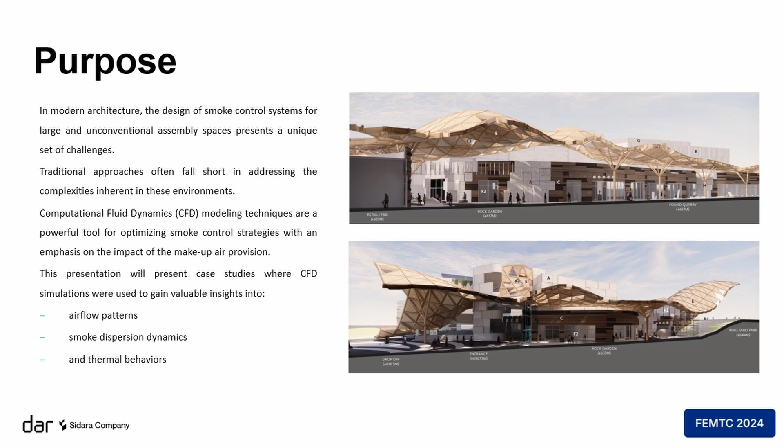So, why is it challenging to manage the smoke release in large and unconventional spaces? The main challenge, as a starting point, is definitely the geometry factor. Basically, due to the geometry, it's very complicated to predict how smoke will be moving.

The second challenge is smoke stratification. So, in complex geometries, there might be stratification occurring at different levels, and as such, any smoke control system that needs to be designed will have to handle different temperatures and densities at different levels. This is especially prominent in case of balcony spill plumes.

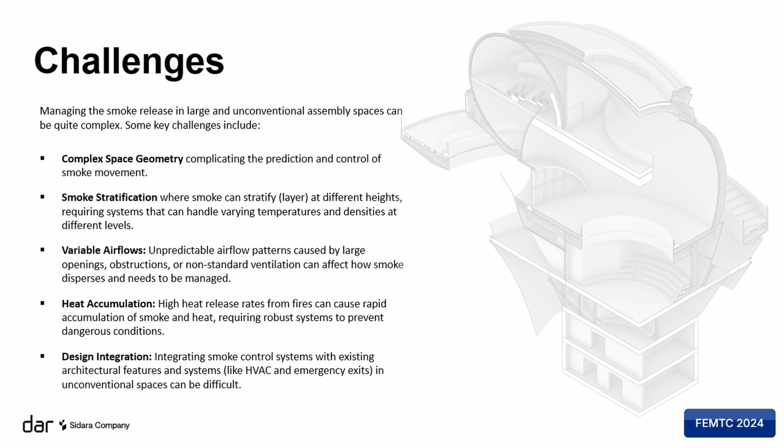Using conventional methods, it's very hard to predict where smoke will stratify and at what level. CFD, as we all know, can basically help us tackle most of those challenges that we just highlighted.

In fact, using CFD simulation, we can model complex smoke and heat behavior, and this will provide us with insights on how smoke will move and stratify.

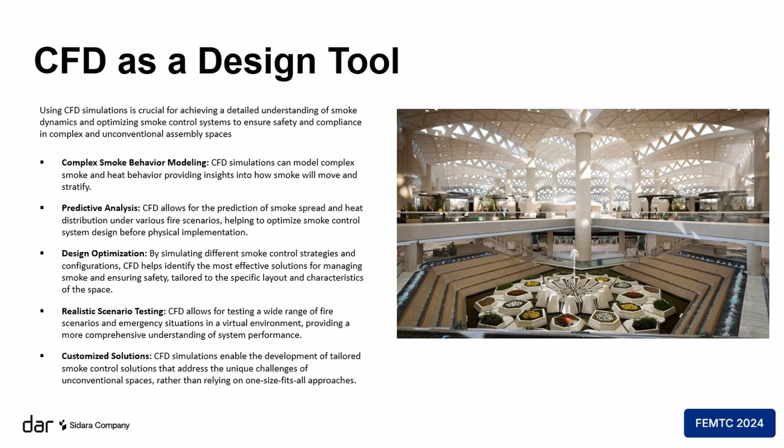These insights can help us optimize the configuration of the exhaust and makeup air provisions. It can help us develop validated and tailored smoke control solutions that address the unique challenges of the specific building in hand, rather than relying on one-size-fits-all approaches.

Following slides, we will just give you a very quick overview on who we are before moving on to the case studies. Dar was founded almost 70 years ago, and it is part of the Sidara collective. We are a multidisciplinary consulting organization, and we have 5 principal design centers and 54 permanent local branch offices.

Our market sectors are diversified, and they include buildings and cities, transportation, water and environment, projects and facility management, as well as digital solutions. Our in-house expertise also covers a very wide range of engineering fields, as shown.

As a firm, we are committed to service excellence and have been consistently ranked among the top 10 consultancies by Engineering News Record for over 30 years now. For instance, we are currently ranked 4th among pure design firms in the US.

Let us now move on to the case studies. The first case study will highlight the importance of properly sizing the smoke reservoir and also of properly configuring the makeup air position.

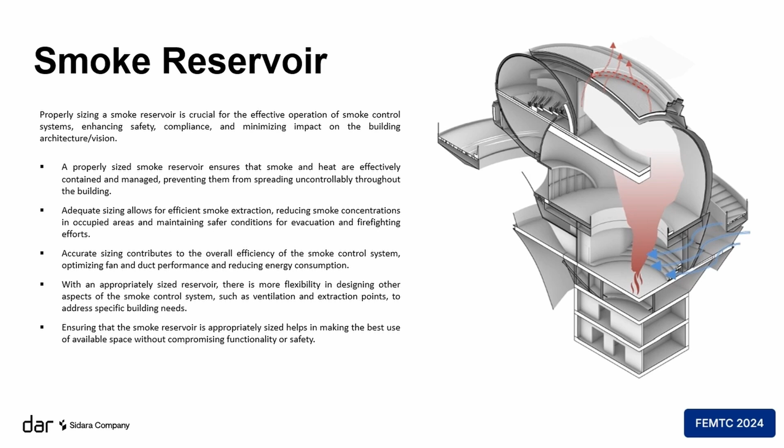The current slide will also help us showcase the importance of the smoke reservoir and its relationship to the exhaust rate. We face a lot of issues with architects and stakeholders where they believe that simply providing the exhaust fan should be sufficient to control the fire or the smoke released from it. Most of the time, we show them this slide.

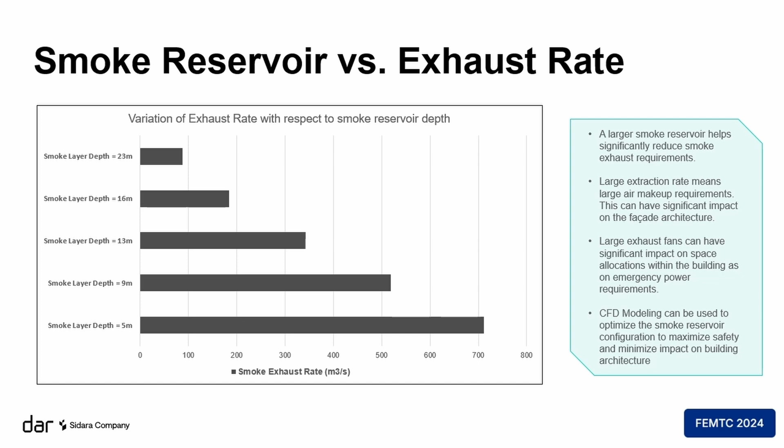We show them the relationship between the size of the reservoir and the required exhaust rate. The numbers shown here are only for presentation purposes, but basically they show the inverse relationship between smoke reservoir and exhaust rate. The bigger the smoke reservoir, the smaller the extraction rate that would be required, and the smaller the makeup air required.

The building in the current case study is not conventional. It's an atrium with 4 levels connected: level 0, 1, 2, and 3. We used CFD modeling to optimize the smoke control strategy. In the first model, we had a fully open space without any compartmentation and minimum makeup air provision. The architect gave us a lot of headaches and was not very flexible in providing the requirements.

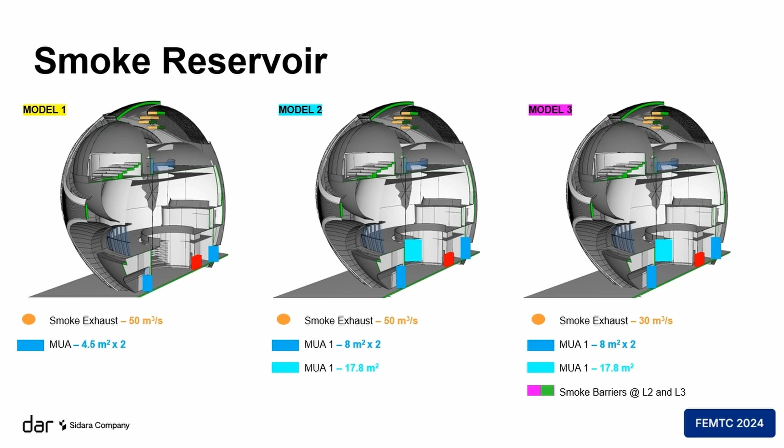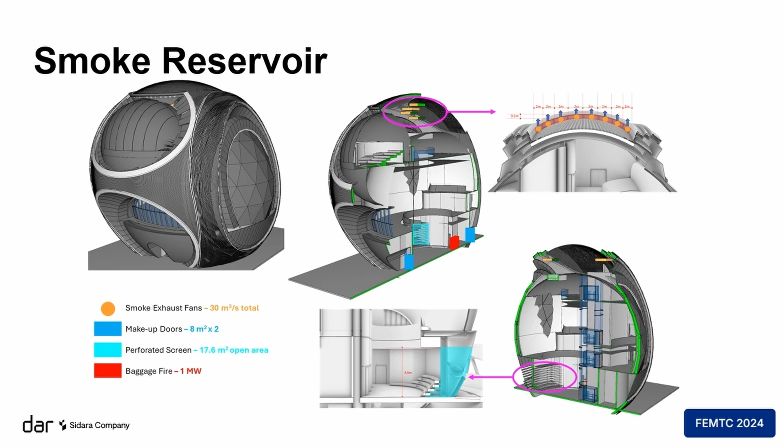Upon failure of that model, we were able to coordinate a larger makeup air provision. However, even with these larger makeup air provisions, we found that a much bigger smoke reservoir would be required. Based on the findings of the second model, we required, in addition to the makeup air, to provide smoke curtains at the upper floors, level 2 and 3, to increase the smoke reservoir. The current slide shows the curtains we proposed following the findings of the second model, and the configuration of the CFD.

In Model 2, we were able to provide a larger makeup area, increasing it from almost 9 meters squared to 33 meters squared, with the same extraction rate of 50 meter cube per second. While there was an improvement in the rising smoke plume behavior, we could still see that tenability conditions were compromised at very early stages on the upper floors.

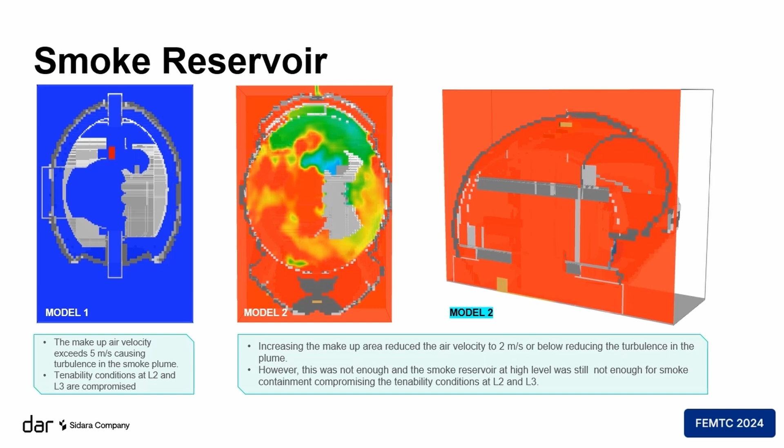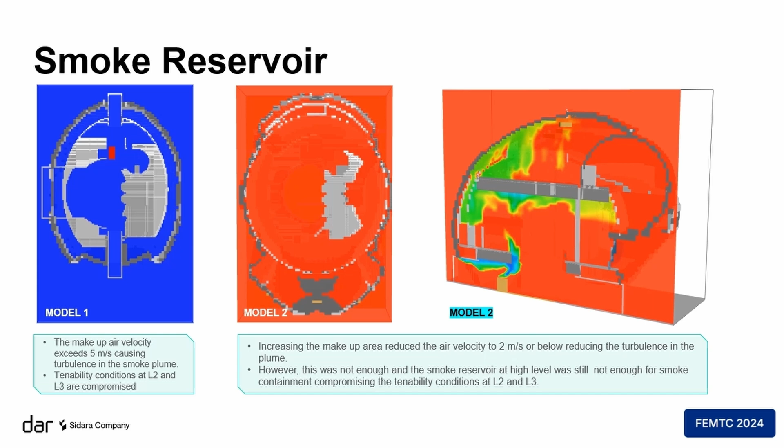If we look at the animation, we notice that smoke was compromising level 2 and 3 at very early stages. We also notice that the smoke plume is plus or minus dilute at the smoke interface layers. We notice that the colors in the smoke interface layer are greenish, meaning there is a lot of turbulence and mixing occurring, which is not something we actually want.

The findings from Model 1 and 2 indicated that, on one hand, the makeup air provision was not sufficient and needed to be increased, and on the other hand, the smoke reservoir was not sufficient and needed to be increased. So in Model 3, we were able to provide additional smoke curtains at the upper floors, which increased the smoke reservoir. We were able to control the smoke release and maintain tenability conditions with an actual reduced extraction rate of almost 40%.

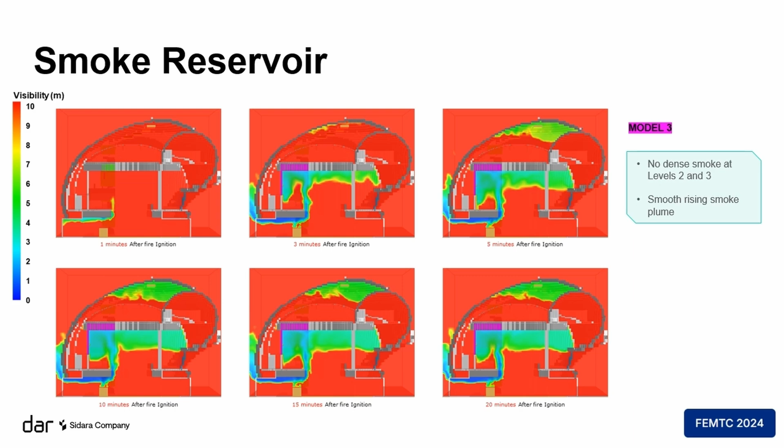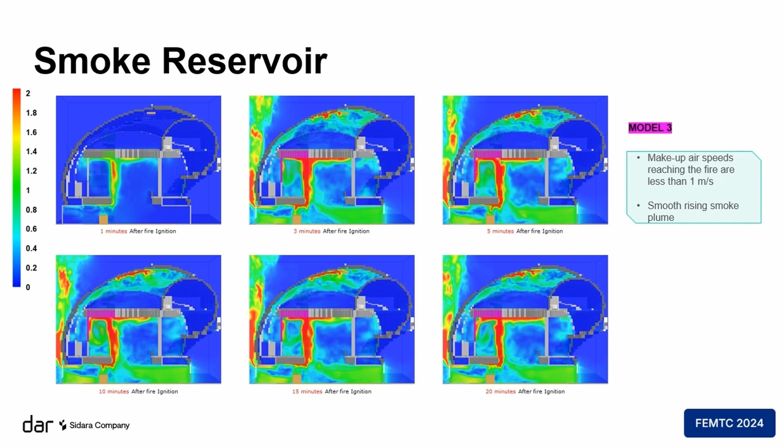In the current slide, we can clearly see that a very stable and smooth rising smoke plume was achieved. The same observation can be made in the current slide, which shows makeup air speed reaching the fire at less than 1 meter per second.

As a summary of findings from the current case study, we can make two important points. The first is the importance of having a properly sized smoke reservoir. Properly sizing the smoke reservoir helps optimize the makeup air requirement as well as the extraction rate. We can see that in Model 3 we achieved tenability conditions on the upper floor with a reduced extraction rate of 30 meter cube per second instead of 50 meter cube per second.

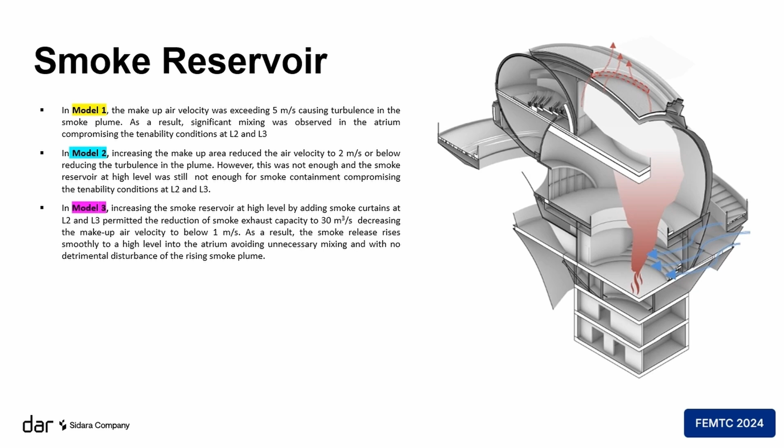Also, the second very important point is the balanced makeup air provision. Without a balanced makeup air provision, it is very hard to properly control the smoke release.

The second case study will focus on the importance of controlling the width of the balcony spill plume. This is a very effective strategy to optimize smoke control systems, because it helps reduce the exhaust requirements significantly. The corresponding makeup air demand is also reduced. By reducing both the makeup air demand and the exhaust air requirement, we can also have a much simpler design with a lot less space.

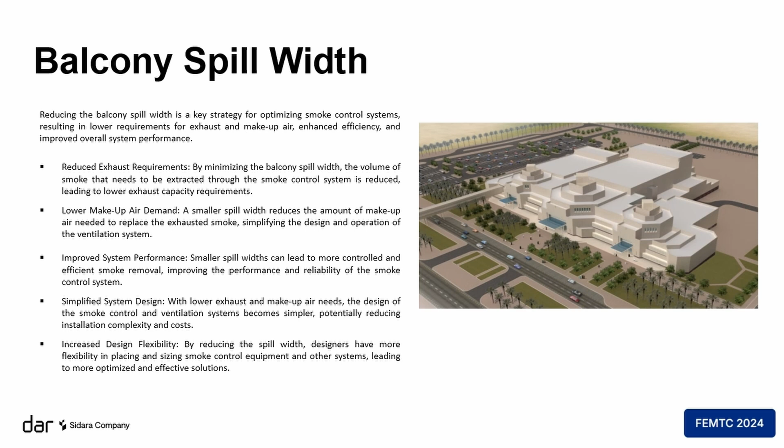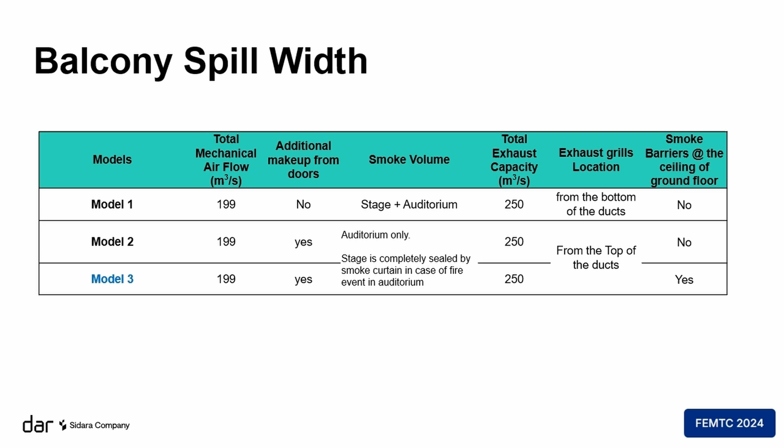In the current case study, we will look at an auditorium with a stage. We will compare three models. All models have the same makeup air provision and the same exhaust air provision. The only difference between them will be how the smoke control system is configured to achieve tenability conditions.

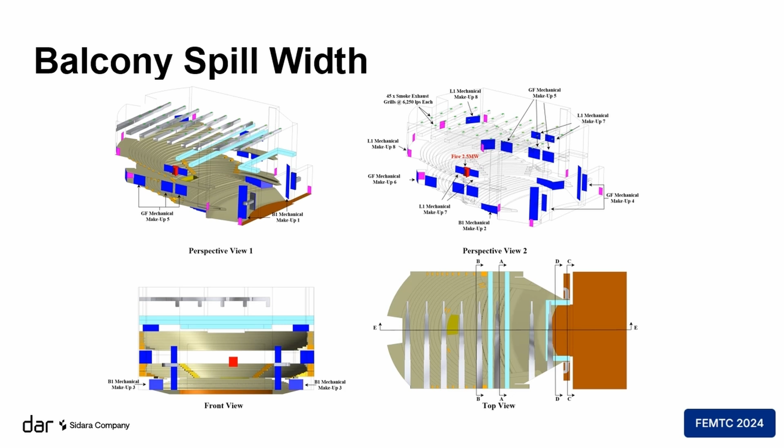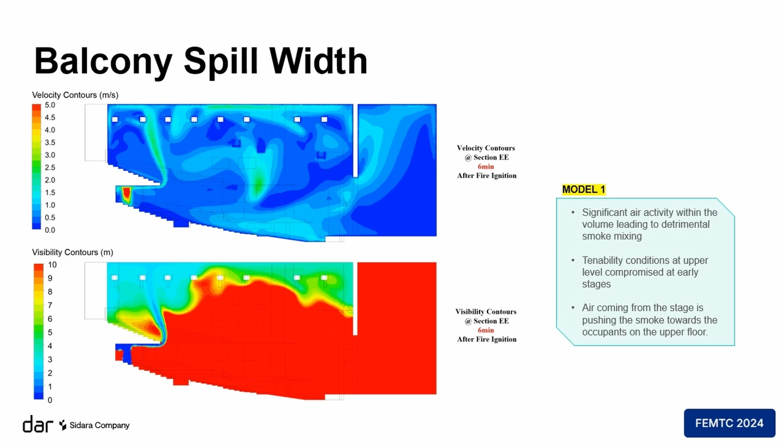The current slides showcase the geometry of the auditorium and stage. In the first model, the stage and auditorium are connected. The results indicated significant air activity in the volume. There is a lot of air moving, and the smoke plume is slightly pushed towards the seating areas. Also, a lot of air is coming from the stage area, which is not actually preferred.

As a result of the significant air activity in the space, there is a lot of mixing of the smoke plume, and we can see that the tenability conditions are compromised on the upper level.

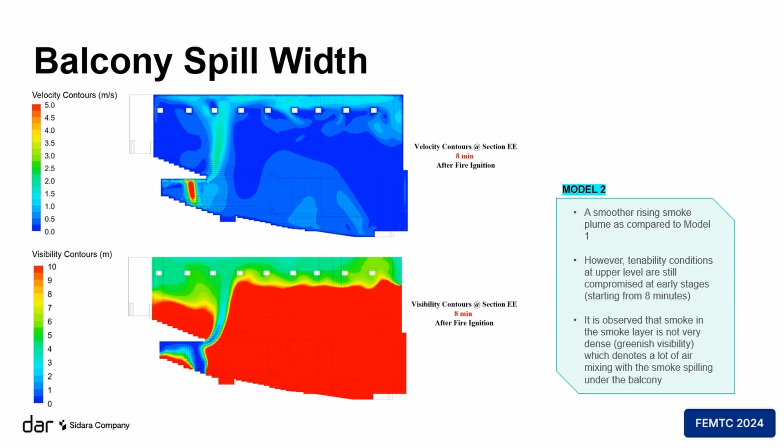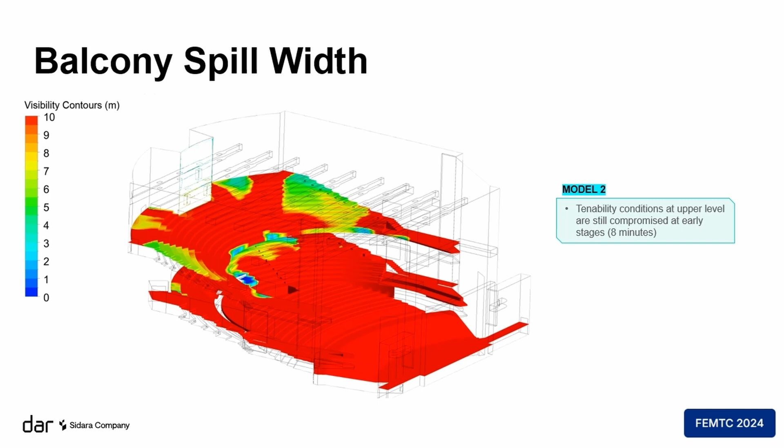As mentioned, tenability conditions are also compromised on the upper floor, even at very early stages, because of the significant air mixing or smoke mixing occurring in the space.

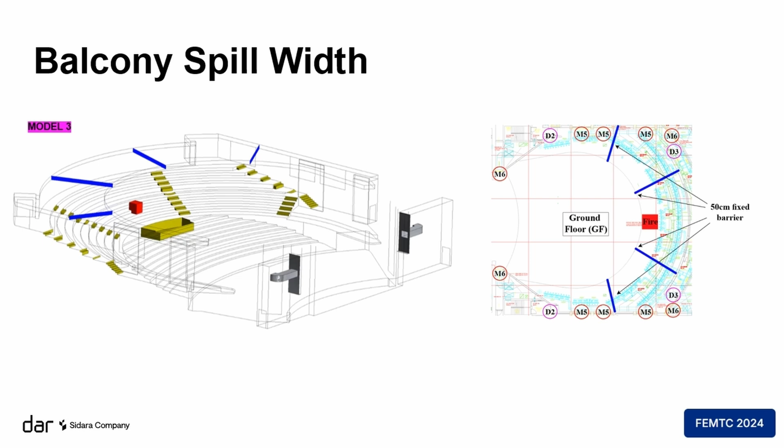Based on the findings of the previous two models, we identified that one of the big issues is the large volume of smoke being generated by the plume. So by limiting the width of that plume, we can theoretically reduce air activity in the void.

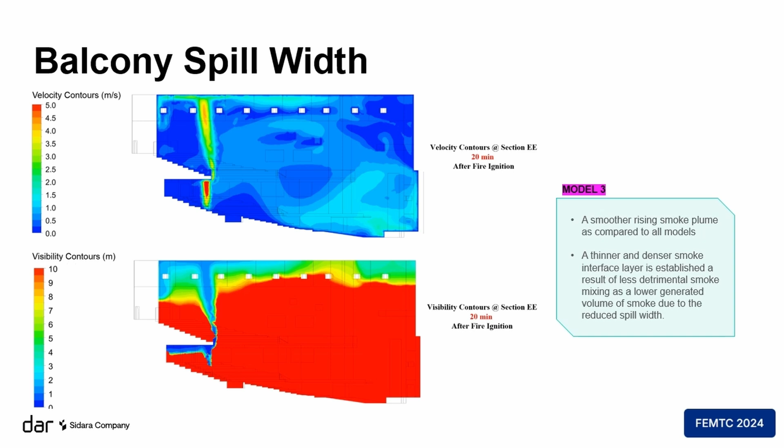The findings from Model 3 confirm our expectations. By reducing the width of the plume, we were able to reduce the volume of smoke spill. The volume of mixing has significantly reduced. We can see there is a thinner smoke interface layer that is now much denser. Tenability conditions are now maintained at all times during the simulations, even at early stages.

As a summary from our second case study, we can see that a successful smoke control strategy could be achieved by simply reducing the width of the balcony spill and by improving makeup air delivery, separating the stage area from the auditorium area.

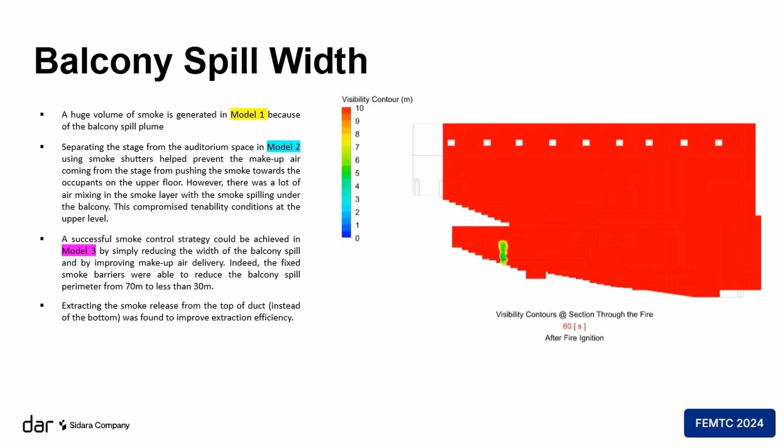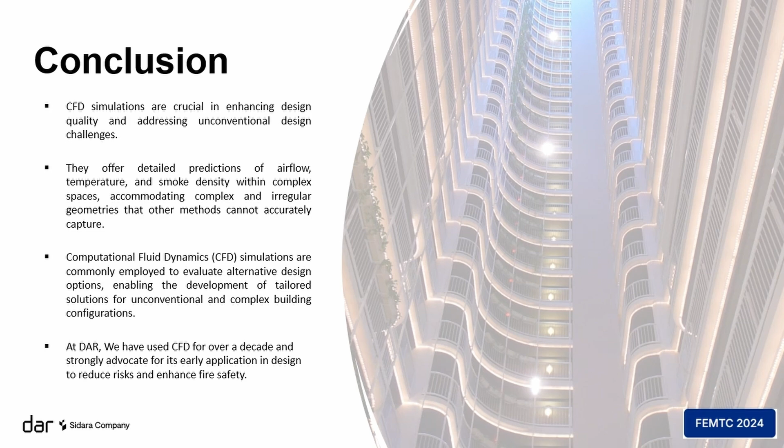In conclusion, we hope we were able to highlight the importance of using CFD simulations to deliver optimized smoke control strategies for large and unconventional spaces. We'd like to highlight that at DAR, we have been using CFD for over a decade, and we strongly advocate for its early application in design to reduce risk and enhance fire safety. Thank you for your time today.